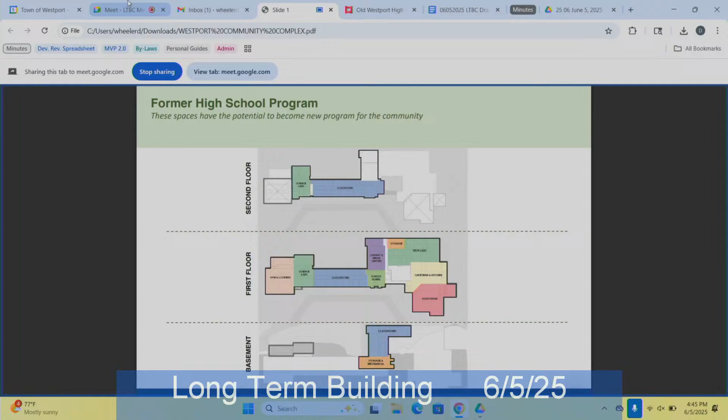Just a clarification - this came up several times in that meeting. People said, why can't we just use it as it is? And you're saying that even using it in its current condition, for its current or historic use, is non-compliant?

That's correct. There's a lot of systems in there that are just antiquated, that don't work anymore, and you need to do maintenance on it to bring it up to date. For example, the kitchen - it may have been a good kitchen at the time, it needs a little bit of work.

But are there code issues that would have to be addressed if we used it as a school? We're not suggesting a school, but absolutely, because it's been vacated, if you repurpose it as a school again it would have to comply with the newest code for schools - fire code, building code, ADA code, change of use or occupancy. We're getting into exactly whatever that program becomes.

So there would be some things to address. I mean, you've been using the facility - we had heard that the senior center kind of moved their way in and started using some of those spaces. There is an element of liability there for the town if they take that without doing further studies to find out what needs to be compliant.

But how about the current use - it's currently used for an after-school daycare program. So that's also non-compliant currently? Well, we know, for example, the egress doors don't comply - you have panic hardware that doesn't comply. Something as simple as that doesn't comply, but they still use the doors, they still open up.

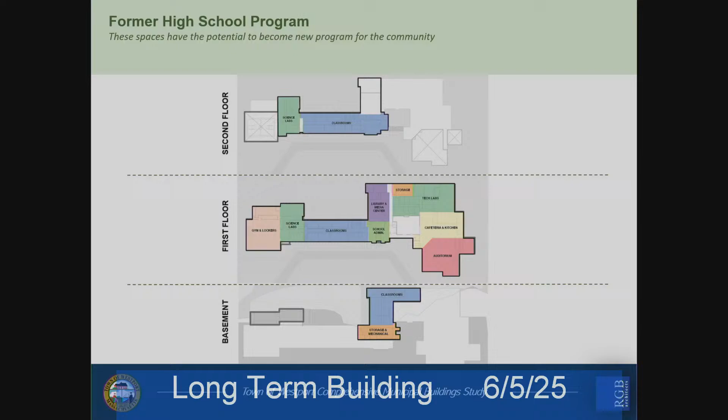So, how the building is used now—just identifying the spaces within. We're not gonna go too far down in that, but mechanical, electrical, former classrooms, the space that was the cafeteria, the auditorium, the basketball gym, and the library. We could probably move through some of them pretty quickly.

Those are the options we talked about earlier, right? So really, to capture those: no action taken, adaptive reuse of the existing space, community campus to make it part of different components—we'll get into little details—and the fourth one is the addition onto the town hall. So, no action taken.

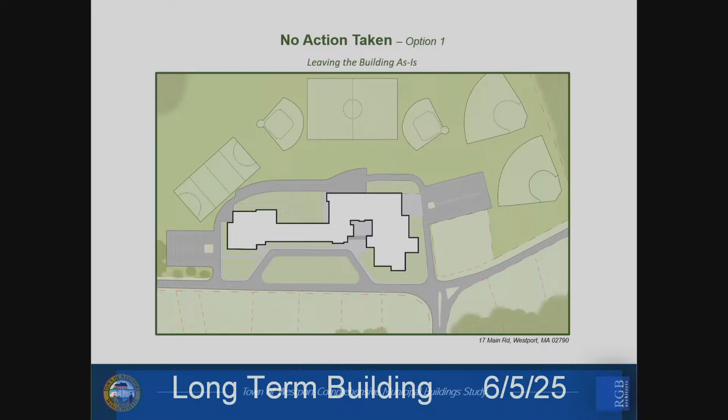This is basically showing a diagram of the existing school, the spaces being used temporarily or now, and what's not being used. So the gray is 90,000 to 91,000 square feet, using 21,000 square feet of a 150,000 square foot complex. It's pretty self-explanatory. Does that include the Council on Aging? No.

No, it's not. It includes the after-school care. Can we also use the word after-school care, because it's not daycare—daycare has a different connotation. Yeah, it's out-of-school time, OST is how we refer to it. We didn't know how many people were in there or what area they would take in. This all came to us new, so if you have that information, we'll gladly put it in.

Don't have it, I just know it's there.

I have one question. The square footage - you're saying 91,000 not used, 21,000 used, 22,000 used. That only comes up to about 112,000, 120,000. But isn't it about 150,000 or 160,000? So why is there a difference between not-used versus used?

Call miscellaneous spaces, spaces like the boiler room, the chemical room, all of those. Corridors too - I just want to make sure I understood that. These are an actual net, circulation as well.

That's fine. So some of the things you've got to look at - no action taken, right now I believe the number was roughly $350,000 to $400,000 a year it costs to maintain the building. That's only gonna get more expensive, just in attrition, but also more expensive as time deteriorates the structure and nothing's done to it.

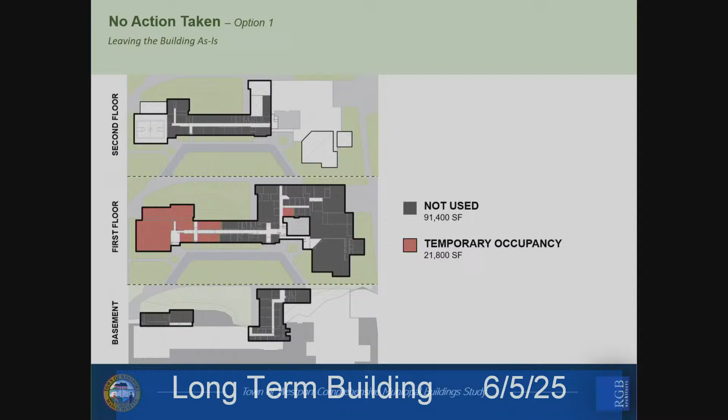So simply doing nothing will continually cost you money, and even more than that, it'll raise your liability claim or potential liability issues for the town, short-term and long-term.

There it is. Reiterating - I should read this thing before I speak, it'd be less for me to speak.

Is one of the costs - the cost that would have to be spent here at the town hall and the annex, if they don't move - where are those costs?

So we did that during the public presentation, we factored that in to figure out how much it was. I believe it was $100,000 and change to keep the town hall going, and we factored that in.

But development - are there capital improvements that need to be made? Are those showing up in this do-nothing budget? No, they're currently not. Shouldn't they be? They will be, okay, they will be.

So again, tonight is a progress update of where we were - we're about 90% there. We wanted to get some feedback, just want to make sure we're of the same mind.

So these are some of the existing spaces not used on the second and basement floor level - the auditorium not used, and the cafeteria kitchen not used. Great spaces, just not utilized. And again, these will get worse and worse as time goes on if they're not heated, ventilated, or conditioned as designed.

This is option 2. Want to talk a little bit about option 2?

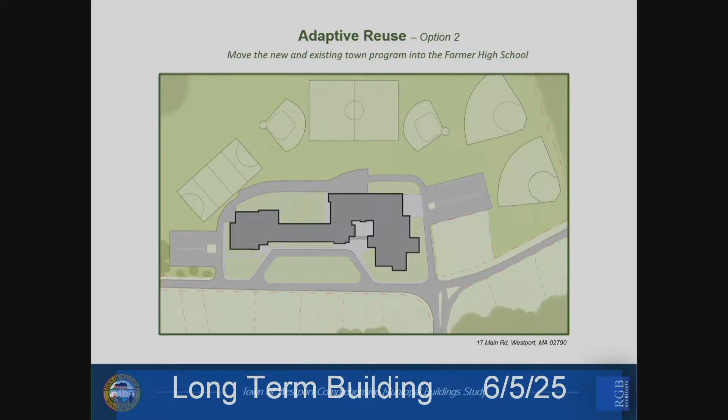Option 2 is maintaining the building as is, demoing just a small portion in the front, what people call the connector or bridge, to provide access. The concept is to insert the components we're looking at, like the town hall and the annex. We maintain the auditorium, increase the after-school program, and provide more or improve the rec department and access for internal sports.

We increase space for council on aging, and we put urgent care in the lower level—if it comes, if it doesn't, that's okay, it's just another opportunity to do something with that space. We had an indoor market adjacent to an expanded farmer's market out on the green, on the lawn on the backside. Mechanical and support spaces, you're gonna need them—right now we kept them in the general area they are, but any improvement to these spaces is gonna cost money and require infrastructural improvements.

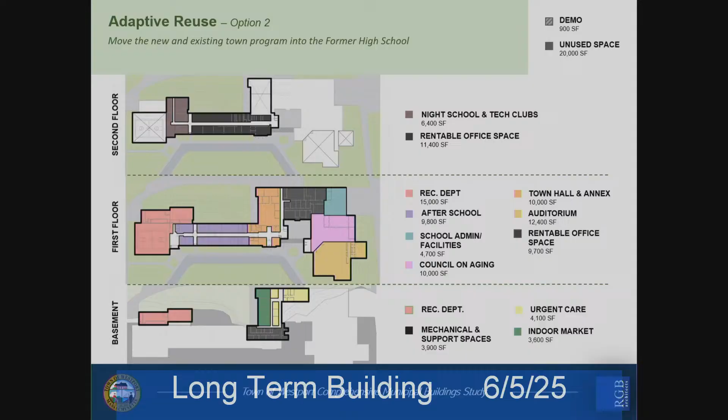So this is adaptive reuse of the building as we see it now. Quick question: the demolition zone shown is literally just that connector, so it would open up the courtyard there. Is there something specific about that part structurally that's in question? Well, in some ways, yes.

Part of our cost, when we get to the end of the presentation, for option 2 was to bring some of these spaces up to code for egress, so it still makes the place safe. That was my question—how much do you have to bring it up to code to do this? We'll show the cost at the end; we have a breakdown, a total fee, and a further breakdown.

I don't have plumbing drawings in this drawing for a quick estimate, but we have cost estimators who looked at this, did a basic square foot cost, and a code analysis, so they knew, for example, that you'd probably have to subdivide this into zones. In the middle diagram, first floor, where it shows a salmon color next to a dark gray color—one would be a heated space, one wouldn't. You'd have to bring it up to at least 45 degrees or the plaster walls and blocks would start cracking. Right now you have one heating system, so there'd have to be a secondary heating or ventilating system to control the variance of those temperatures, so you're not paying for heat in areas you're not using to the fullest extent. Currently that's not designed that way mechanically or ventilation-wise.

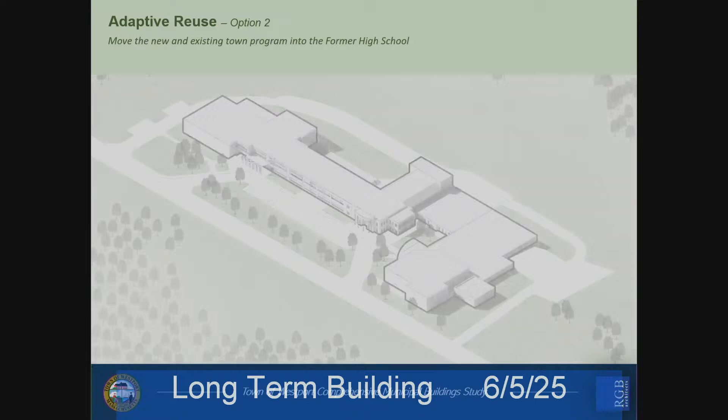So you can see the added parking—this is number 2 with parking in front, and we did a basic 1 to 2 ratio. We looked at your zoning ordinance for parking requirements. Using a simple square foot method, if you design a parking lot at 300 square feet per car including circulation, we took the number of cars times 300 to get the area we had to make up, so there is ample parking. We had to add parking to the right near the fields and to the left near the gym, and at the entry we took some trees and grass down, replanting some with islands to afford more parking there. We had to hold off on using the cemetery.

One of the young guys in our office suggested putting the parking lot right here. I said, no, no, no—that's a cemetery.

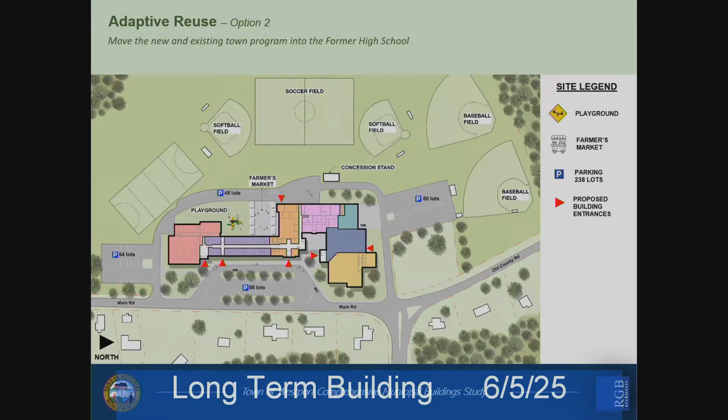Do you want to go over the farmer's market and some of the outside elements, like the concession stand? We put in a few amenities—since you use the sports fields, there's potential for a concession stand and increased parking, plus a playground in the back for after-school or younger kids. In the other section, we looked at expanding the farmer's market square footage and how it might be used. Really it's just a pass on the exterior perimeter site conditions—no major landscaping or topography shifts, just improvements on certain components.

Going back to the earlier question—if we looked at a housing element in this plan, there's ample square footage to put one in. If we're given direction to look at that, we can fit it in as part of the element so it works with the site, whether as a separate, more private area away from the public functions—so you're not bothered by a farmer's market on a Saturday when you're trying to nap or watch TV. We'd look at all that, but in this scheme you do have ample square footage for another function or use.

This gives you some stats—Mason, do you want to go over this? This shows, for some of the existing town programs, how much space they would gain or stay the same. The Council on Aging would get about 5,000 more square feet, Town Hall Annex would stay about the same, and the after-school program would gain about 4,000 square feet.

And these are all net usable square feet rather than gross? Yes, they're net usable. The only hesitancy in putting it out there is—right now the Town Hall Annex has about 15 people in 8,000 square feet, and they don't really use that effectively, so could they live with less?

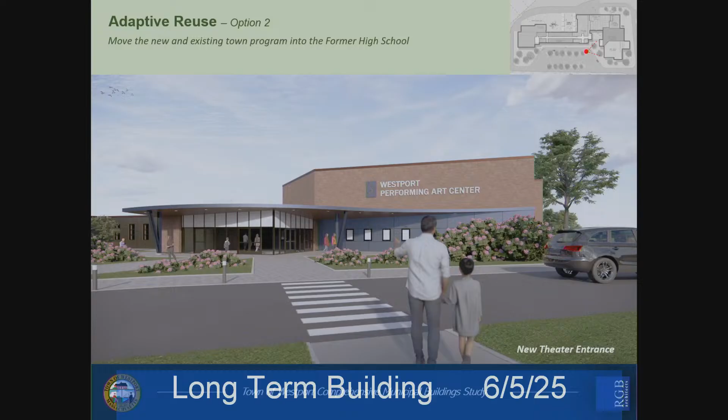Because we believe the space right now is a really good space, it can be developed. This is your existing entry here, and we could change this to something like this. Oh, there it is, yeah. Okay, so that's still the same building, just treated a little bit different.

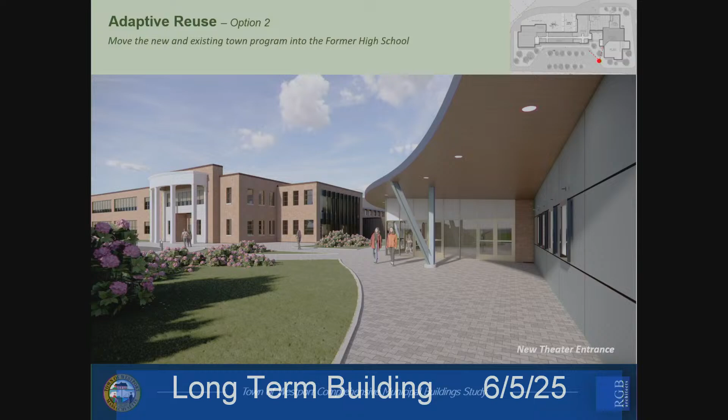Upgraded, gives you some pavers, took out the connector, gives you some walking paths, so it's different, and you could have vendors on the outside on different events, selling hats, t-shirts, whatever they do on a vendoring type thing on this end of it.

Another look here, this is option 2. Yeah, that's where everyone goes in to vote currently, right? Now we're changing out the windows.

Right, so this is the after-school area, right? Yeah, so now you're creating another entrance here. This entrance is for after-school. I'm not getting confused, I'm not going down there. I can now segregate my interior corridors, segregate the buildings, so I can have two distinct functions with plenty of parking around it, or in this case, three, or even four schemes.

You can have - we're looking at the second floor being, what is that, maybe for high school age or later. Do you have a space for after-school programs, or a tech course, or something like that - an extension space for that on the second floor, where the younger children don't have to go.

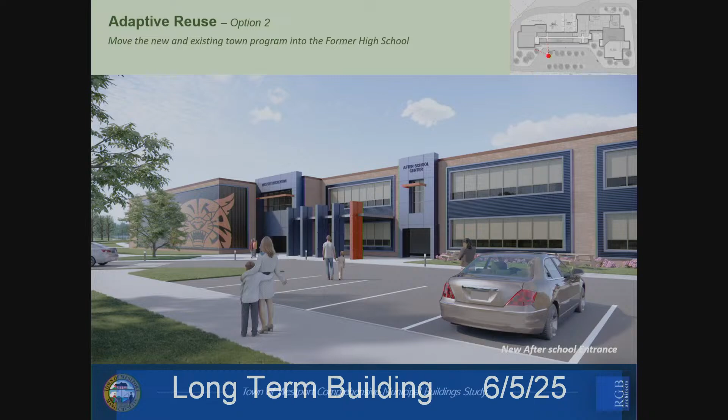The sports to the left, yeah. So go - this end of the building, when you look at the cost, it was new windows, new entries, new circulation, egress, new fire alarm, new air conditioning, new heating, ventilation - all those, you may have, but far less than having to recreate the internal structure. Oh my God, if it was steel, you'd have to build this thing down and build it back up, plus the time frame on this thing is so much less.

Right, time is money, right? And inflation keeps going. So if I can do this renovation in 8 months as opposed to 16 months, then I've saved 8 months of inflation at 6% per year. So you save a lot of money, plus on the materials themselves and the labor.

Okay, so that brings you right to - and these can be done in phases. If the town doesn't want to absorb all this cost all at once, they don't have to, they can go in phases. You can do it segregated, and depending on what happens in phase 1, if it really gets a kick and people are really attracted, you may advance to phase 2 and phase 3 earlier, depending on the use.

Some of the inside use - is this the Council on Aging? Council on Aging, sort of looking into that.

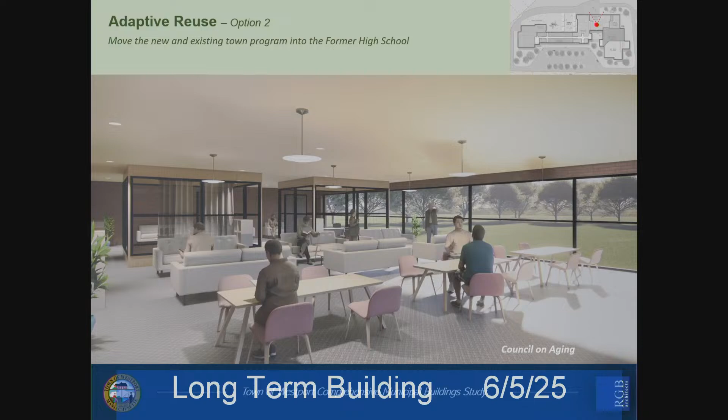In a school where your focus is on the teacher, you're not supposed to put these big pieces of glass looking outside, but this is a different element. Again, utilizing the same structure, the bulk of the cost of a building, you can retain that, and then do these other elements to really open up the space and make it look nice.

Right now in the annex, they do everything on partitions. So to have a private conversation, they have to all go into one room and close the door. They've got air conditioning units that aren't the most efficient, hanging out the window, with air leakage coming in winter and summer. This would all be fixed.

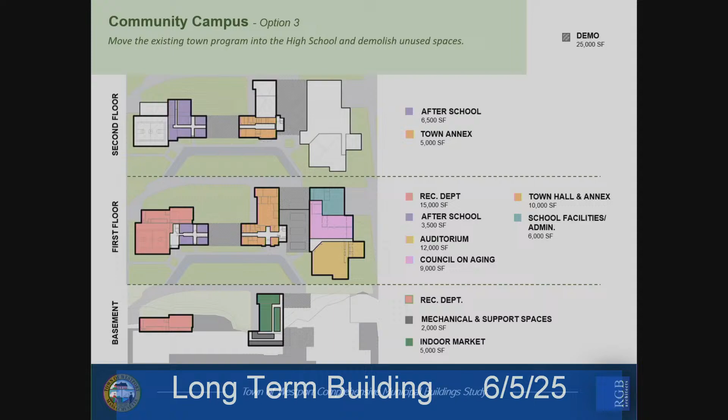You have the pale pink, the rec department and athletic department, for after-hours and weekend use as well, with control. I think the next plan shows you how you come and go from it. But the school facility stays in the back. That's a first pass of what it might look like.

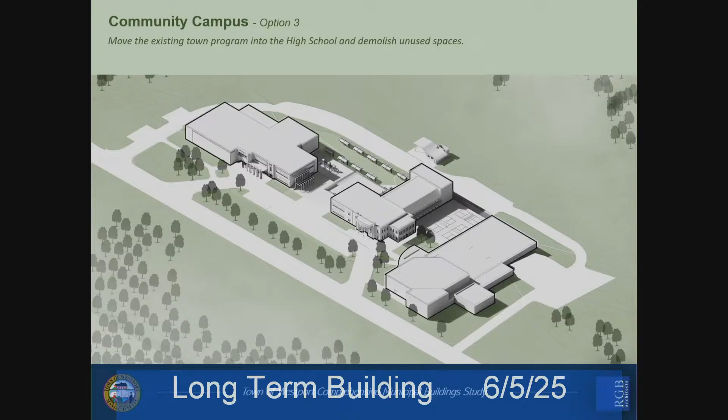Your concessions, your farmer's market - we terrace down, so you have pickleball close to the Council on Aging, but it's open to be used by others as well. You have an outdoor playground, and spaces that terrace down between the two buildings. So it's compartmentalizing in a sense, but using the bones of the building without destroying it completely, keeping the things that are more costly in place.

Would it be appropriate to ask here, what's the difference in usage of square footage between the previous scheme and this one - are they similar, as far as total gross square footage usage? It is smaller.

Removing - we'll take the underutilized space out. I have the benefit of having the presentation right in front of me. There is a breakdown at the end. Is that coming later? Yeah, no worries. Oh yeah, good call, that too.

Demoing about 25,000 feet.

What are you doing with that blank area? You utilize it, as this drawing shows, for outside activities. So now you bring in outside activities, the area's not there. It gives you an opportunity to stabilize or keep the existing structure without additional cost, but you add a lot of elements to the outside and create different spaces.

And again, this can be done in phases. Phase one would be on the right, phase two you start with the town hall initially, then go to the left with the after-school events, and to the right for performing arts. This is far easier to phase because you know what you're focusing on, and the rest stays until you can develop the money or the funds for it.

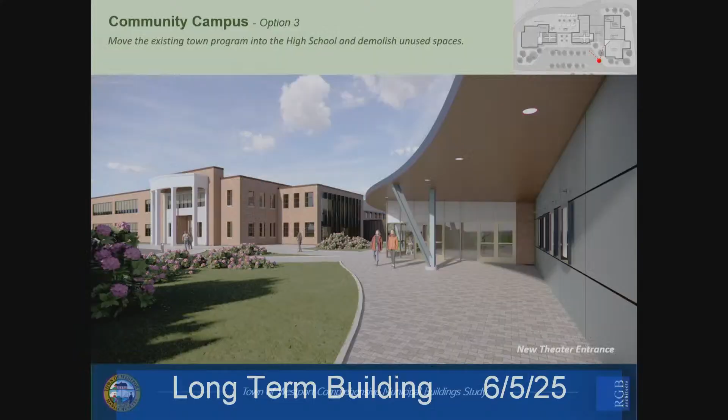This one's different, because we actually separate and cut out the second section, and that's subtle, but the center of that's gone now. We'll see the other slides. If you look at the top right you see a little red dot, that's what you're looking at. This looks similar but it's a little different, similar but the function will be different. You can see back how, on the right, we cut off the side going up to the second floor.

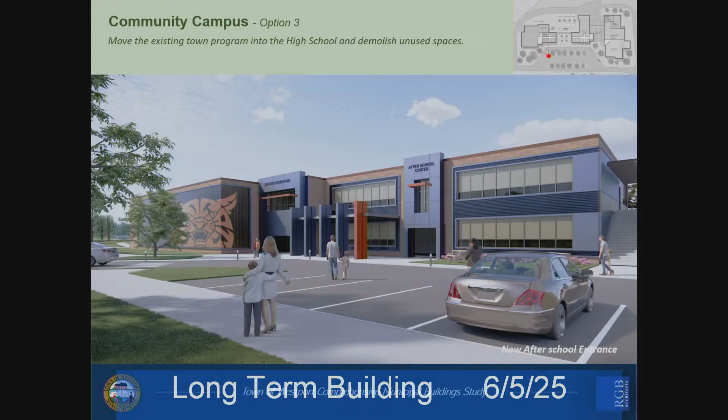That's the space between the auditorium and what might become the town hall, which is the school entry now. That's the flat between the two. So it still has a character of a municipal building, which we tried to keep and bring into it, so it still looks like it functions, but it's adjacent right to that Council on Aging.

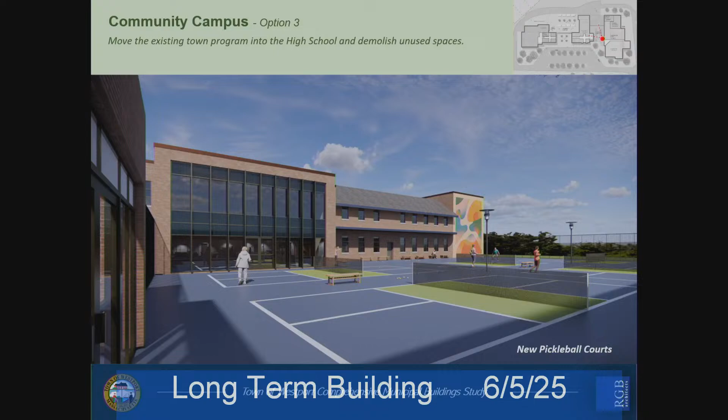It brings the scale down a little bit, makes it play with the looks, looks a little bit more inviting, rather than a large unapproachable building. This is another one of the spaces on Council on Aging, just looking at it from a different angle.

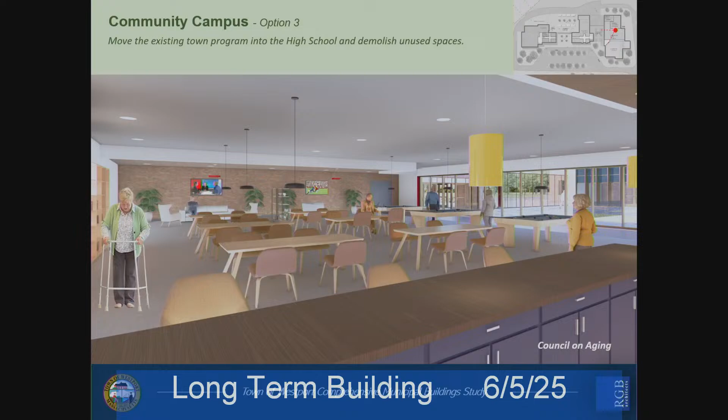Sort of in the cafeteria, but the idea is that space could be a pre-function space at night, if you're doing something in the auditorium, and then during the day it's Council on Aging, they can move around, have coffee, it could even be like a servery, and then at night it closes up. There's a lot of flexibility in that.

A separate stretch and yoga component, for Council on Aging.

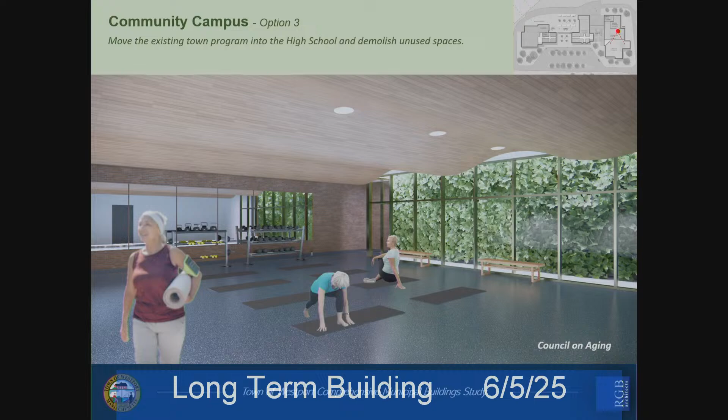So what's interesting in this is we modeled this entire building, so every one of these spaces are real spaces inside this building that can be utilized for this. So this wasn't facetiously just drawn up. This wall really exists there, we just blow out the wall and put more glass in. So the heights are accurate and the walls are accurate. We wanted to show more that you can convert some of this space rather than that you can't.

So this is right now the outback, the backside. And then convert it into a bazaar, the farmer's market, any type of event space. We went back and forth on whether you make permanent structures or carrols, or is it something that's leased or time shared. It depends, but I think the opportunity could take on any type of role there, but that's the idea - take it, make it into a place that the community could engage.

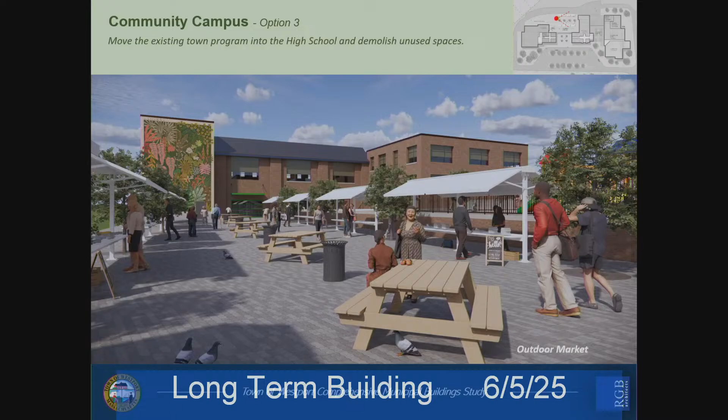I think the outdoor market, and then at the very far end, we cut a hole and you go in and you could have an indoor market. So in winter, if it's nasty, it might be smaller, but you still could have a place for indoor sales. Right now the annex houses the winter market inside, and then the summer market outside and around it.

Yeah, oh, what is that, the cricket? We call that the cricket? It just sometimes...

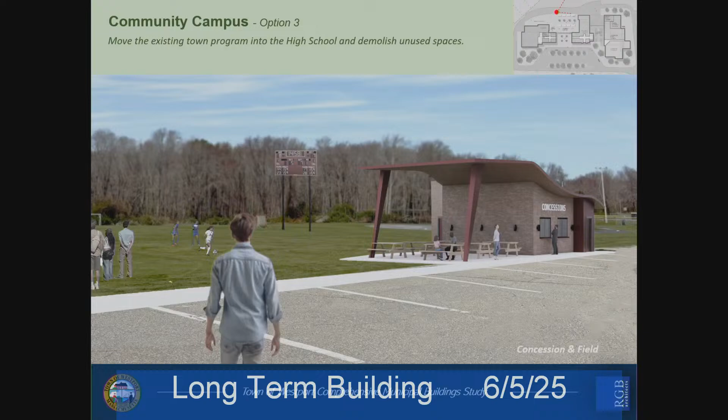Concession stand - it's a folly, but a concession, a restroom, something that gives back a little bit more than having to come into the building when you're out in the public, out in the field, with the school using the field on the weekends. Who takes control of that and cares for it? We don't know yet, but it would be something you can offer for command and control, so you don't have people playing the fields and just walking through the building, not doing everything they want to do.

More realistically, what they had was one porta-potty, a porta-john - a fancy porta-john. I'm talking about what was there before, when you had soccer practices, you'd have like 400 kids and one porta-john, baking in the sun.

So maybe that's increased. That's the idea behind it - really think about how that outdoor space is used and who's coming to it.

Just as a general comment, I'd be curious - I'm sure this is part of the analysis - the space with that campus model versus the previous model, the demolished space. Obviously that's now less space to renovate. How does that cost compare to the demolition cost for that space? I'd just be curious on that piece.

I can tell you, there's a difference of about $6 million between Scheme 3 and Scheme 2, and the difference is a lot of the outside elements.

Which one is demoing more? Three, naturally, because there's a lot more hardscape you're adding to that. And every time I cut a wall down, now I have an opening. Put a wall up, stuff like that.

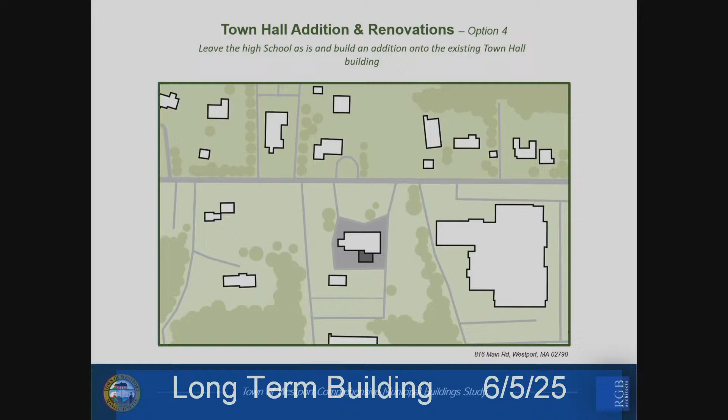This next option, 4, takes the existing site plan of the town hall - you're putting an addition on the back. That would take the area that now occupies the annex to this existing town hall, and really nothing at the high school. So this is a divorced scheme in a sense from focusing on the high school building.

But could you take the annex and build here and renovate this as well? So, there are other comments like, oh, we can't lose the town center, or what would we do with it? Well, you could convert that into housing as well - blasphemy, but the town center could move somewhere else and still survive. Now, do you have a cost analysis of this as well? Yes.

So this is maintain it, do some type of an addition. We tried to do a cool glassy box, but knew that wasn't gonna fly. Something a little bit more respected, I guess, to the architecture of what's here.

Historic gave you a hard time with this one. Historic would prefer a glass box next to the existing - I'm not sure the public will, but that's certainly what... They kicked me off the Historic Review Commission now, so... kidding.

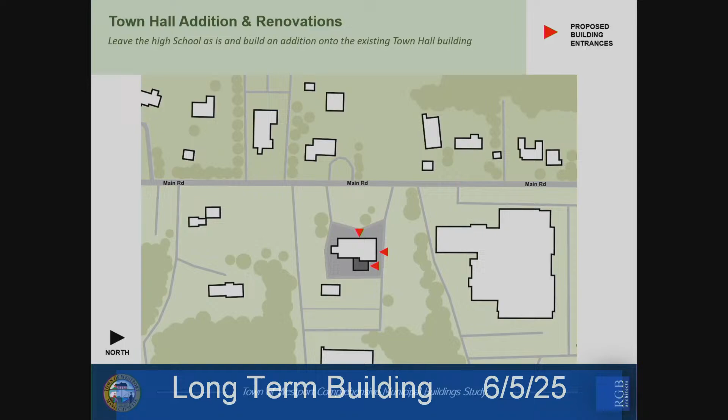So there's these building entrances - this one creates different entrances where only two exist now. You would have a third entrance there.

This is the Ben Franklin method, yes, right? Always. This is what's going to generate your ideas. Why'd you do what you did? Well, there's different factors of why we did what we did. Certainly this is a working meeting tonight. If we miss something, or you guys can think of something else, we'll log that down and you'll see it incorporated, so that's the idea. We tried to keep them pretty simple, because I tend to talk too much.

I don't see how option 4 is a separate option, because you still have to address what you can do at the high school. Yeah, option 4 kind of combines with option 1. The town can do absolutely nothing right now and just put an addition onto the town hall. It's really a 1 and 1A. Could be. But you've got to address the town hall if you do option 1. Yes, so it's really part of option 1. Right now they're not addressing the existing high school, they're just paying for utilities. So they're not addressing it, you should address option 1 code-wise for liability, if anything else. Protect the interests of the overall town.